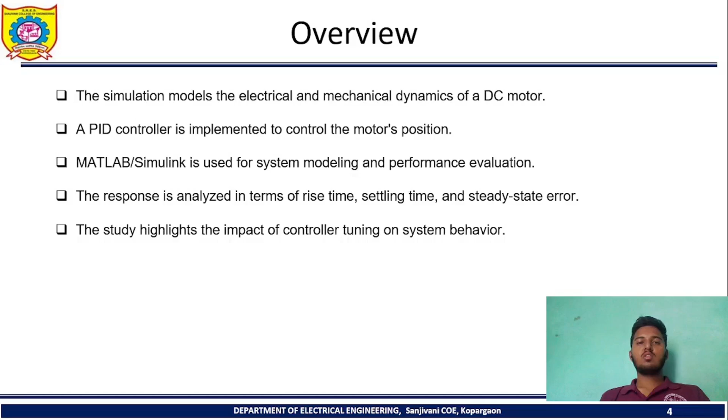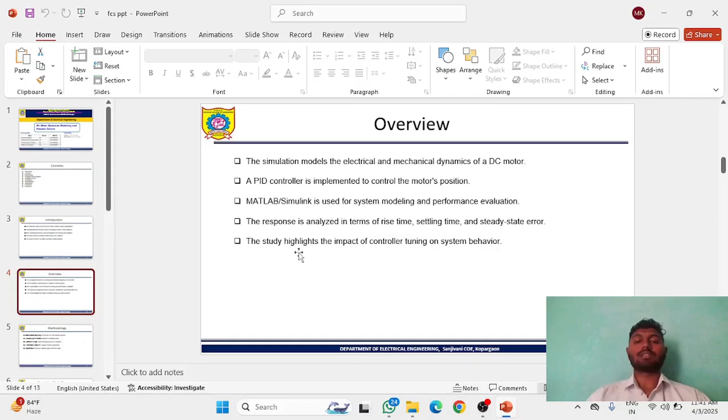The electrical and mechanical dynamics of the DC motor. We simulate this model in MATLAB Simulink software, which we use for system modeling and performance evaluation. The response is analyzed in terms of rise time, settling time, and steady state error. The study highlights the impact of controller tuning on system behavior. The methodology has five types: mathematical modeling, Simulink implementation, optimization, control design, and performance analysis.

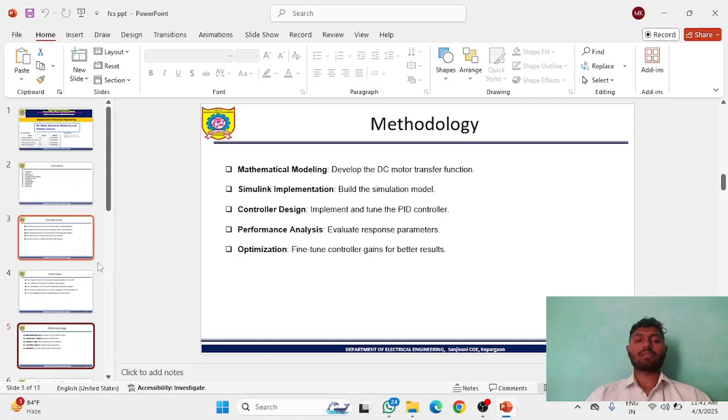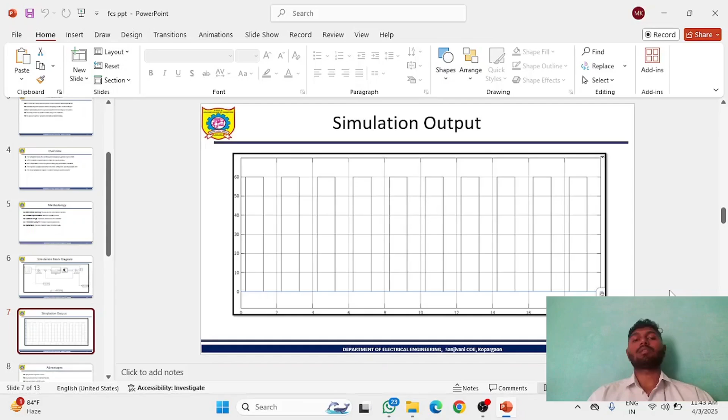Good afternoon. In this code, we simulate the DC motor dynamics and control for modeling. In this code, for the open system and real system position controller, we plot the graph of two parameters, time and position response. This code includes the legend, input functions, real system and simulation. After running this simulation, we successfully get the graph for time and position response for the DC motor. We run this code.

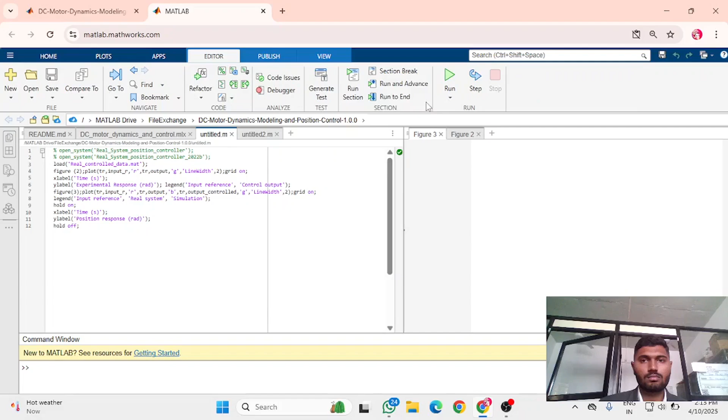So we get this graph: in the x-axis we get the time, and in the y-axis we get the position response in radians. And the green line shows that the simulation occurs.

After that, we develop a second code. In that code, after we run the code, we get the block diagram directly. So in this code, we generate the figure of the block diagram. In the x-axis we get the time, and in the y-axis we get the simulation response in radians, and legend commands for input reference and control output. After running this code, we successfully get the block diagram.

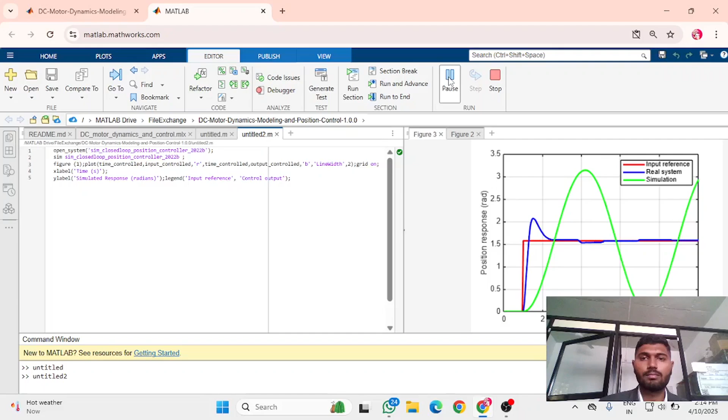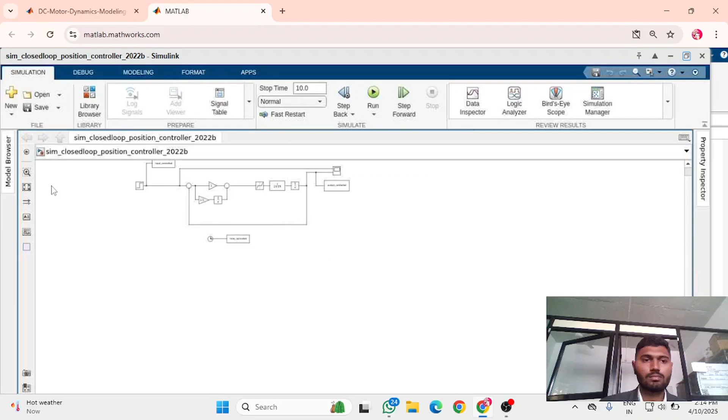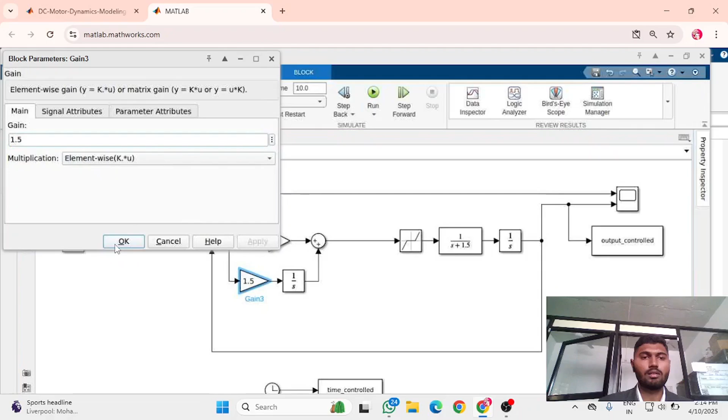So in this block diagram, we add the two gain blocks. We put the value for one gain block as 1. Apply, OK. Then for the second gain block, we consider the value for gain as 1.5, and after that add the additional values for the gains: numerator coefficient 1 and denominator coefficients 1 and 1.5. So we apply here, okay, and after that we run the code.

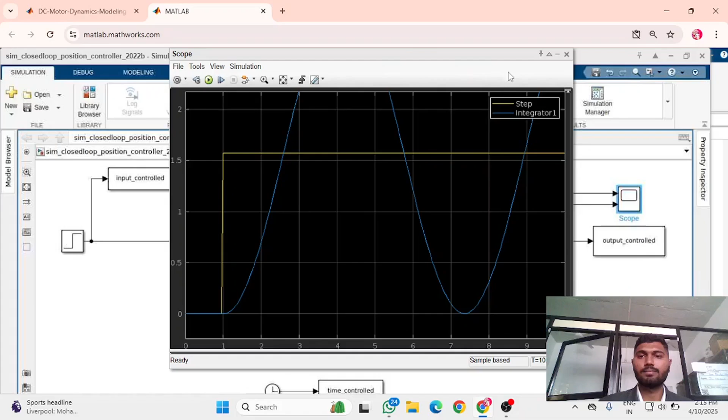In this we get the output for the DC motor modeling and control. So we directly go to the output graph. Here we get the output graph. So this blue line is the integrator value after running the code, and this is the step function graph in the yellow color line. So this is the descriptive explanation of our block diagram for DC motor position control and modeling.

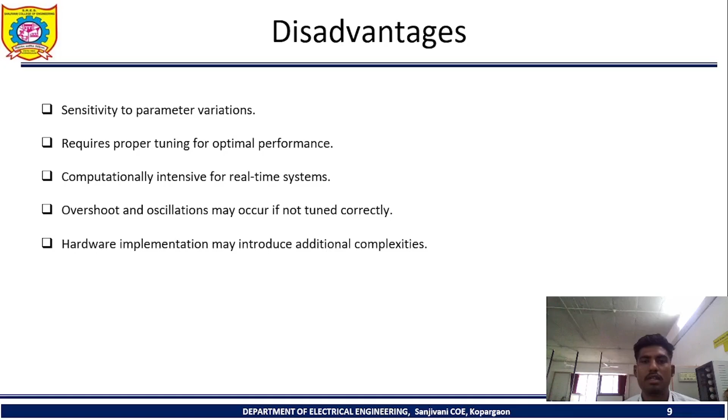Talking about its disadvantages. So, the first point is sensitivity to parameter variations; it requires proper tuning for optimal performance. Computationally intensive for real-time systems; overshoot and oscillations may occur if not tuned correctly. Hardware implementation may introduce additional complexities. So now the topic, applications.

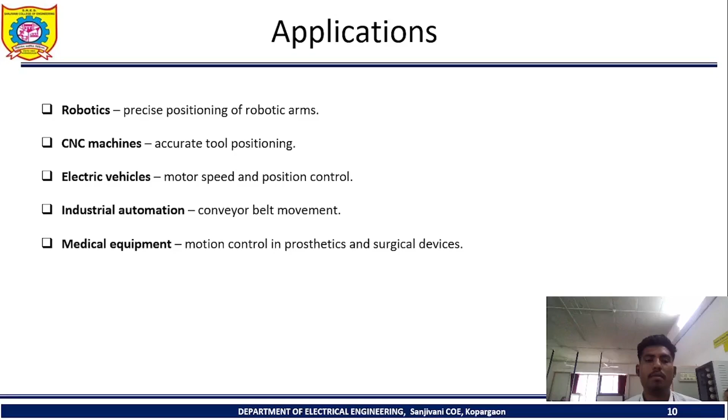It is used in robotics for precise positioning of robotic arms, and also used in CNC machines for accurate tool positioning, and in electric vehicles for motor speed and position control. In industrial automation it is highly used for conveyor belt movement, and in medical sectors for maintaining motion control, and in surgical devices.

Now its conclusions. This simulation is created in MATLAB software. MATLAB software is very widely used in electrical sectors. MATLAB simulation of DC motor dynamics and position control provides powerful tools for analyzing motor behavior and designing effective control strategies. By modeling the motor's electrical and mechanical dynamics using differential equations, we can simulate its response under various input conditions.

Implementing controllers like PID enhances position accuracy and stability. Such simulations aid in optimizing motor performance before real-world implementation, making them essential for automation and robotics.